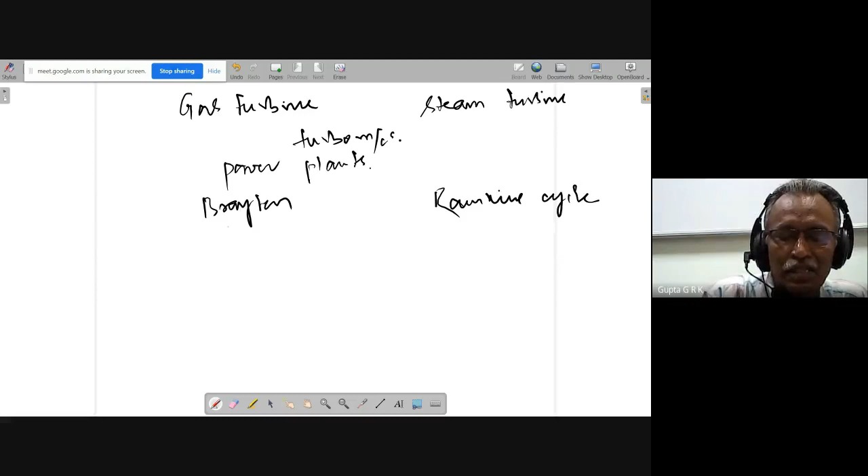So when we see the gas turbine and the steam turbine, both are turbomachines, and both run the power plants, and both run on cycles. This is a Brayton cycle, this is a Rankine cycle, and both will have four processes, as I told: compression, heat addition, expansion, and heat rejection.

So this compression is isentropic here, and this is also the same. Heat addition is isobaric, so this is also the same. Expansion is isentropic, and here also it is the same. And heat rejection is isobaric, and this is also the same.

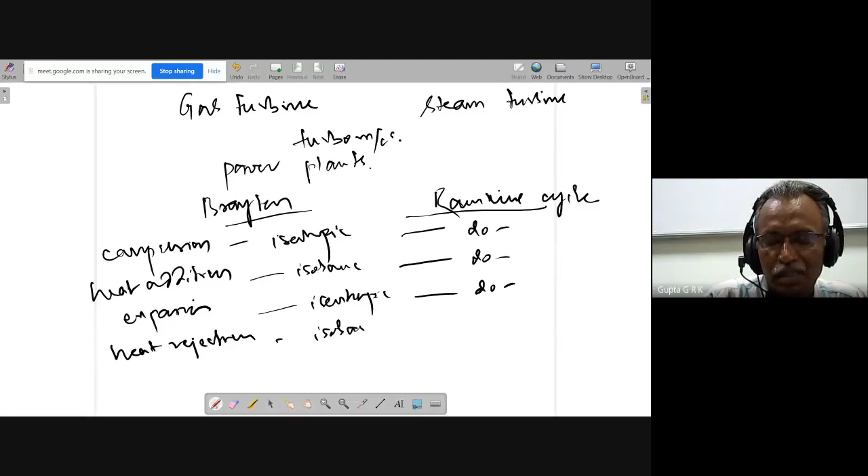All four processes are similar processes, but still we call them different cycles because one runs in single phase, the other runs in two phase - that is the only difference. So you will see the phase diagram in the Rankine cycle, you don't see that in the Brayton cycle. It is completely, we assume the gas is perfect gas mostly, or real gas also, or ideal gas - sometimes Cp and Cv variations also we consider. So this is the main thing between the Brayton cycle and Rankine cycle.

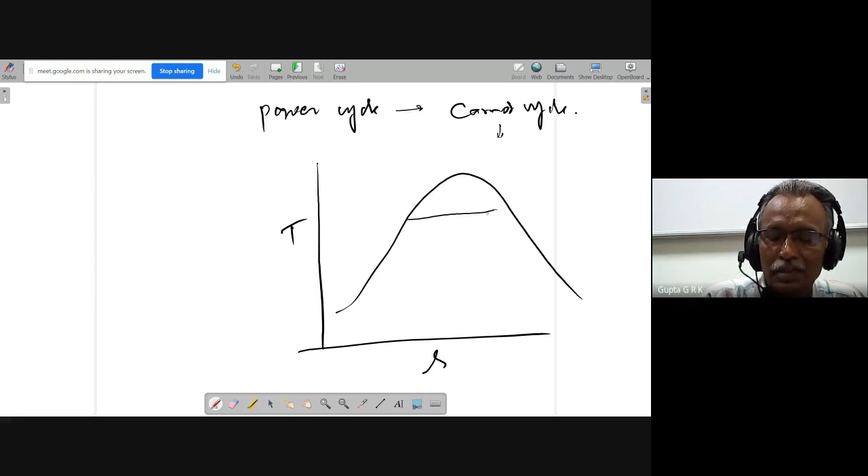And always we try to have a power cycle, because both are power cycles only. I want to have a Carnot cycle. So when you have a TS diagram with phase line, and if I want to have a Carnot cycle, what I can think of is a cycle like this. This is pumping, and this is heat addition. And I can say WT - there is the turbine and the QL. So this is the way I can assume a Carnot cycle, which is a clockwise cycle within the phase diagram.

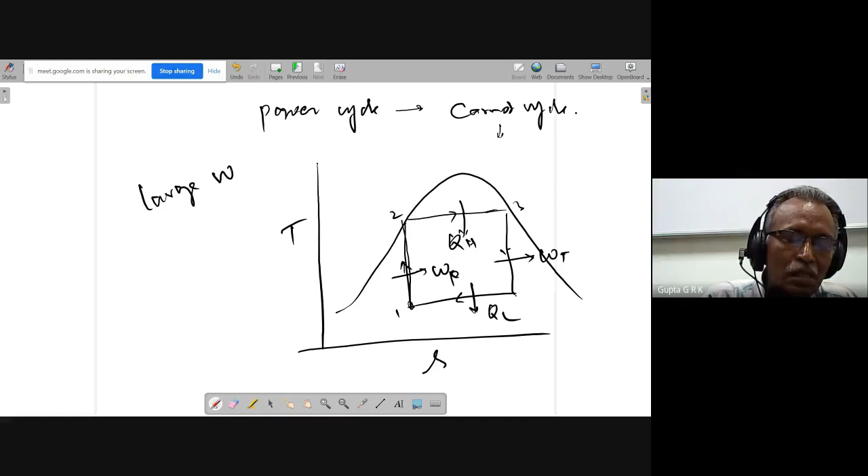So when people tried this, we have discussed already that there are some practical problems. One is the pump has to work in two phase, and also the volume, because most of it is vapor, and it needs a lot of compressor work. We cannot say pump or compressor because it is a two-phase one, and because it occupies large volume, it will be of a large size and large work of compression will be needed.

And another thing is this point - point 4, that is the wetness at the turbine exit. I should not have so much wetness here, because during the expansion there will be condensation and droplets form, and it erodes the blades.

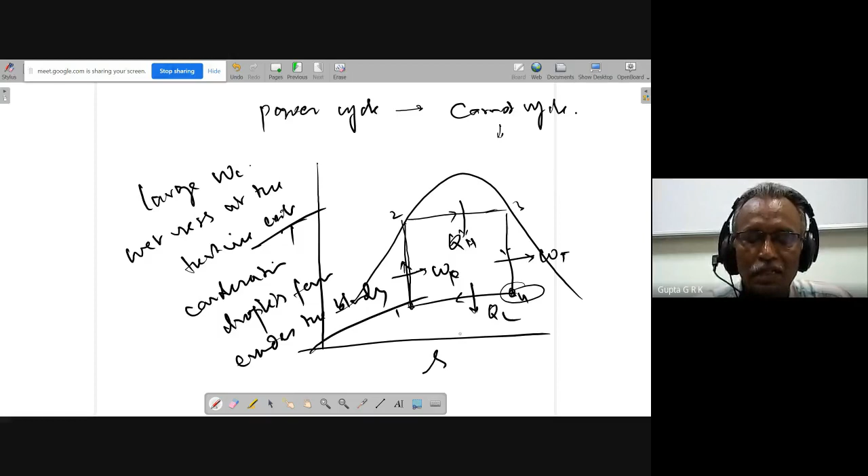So I cannot have this way, but still people may think of Carnot cycle in a different way. Suppose if I assume the Carnot cycle going like this, so that this problem of these two points will not be there. There will not be two phases, only a single phase. So you can think of a cycle this way also.

So again, WP, WT, QH, and QL. Here there will be other problems. This is going to very high compression ratios, more heat rejection, yeah, high compression ratios. Heat rejection, more heat addition, rejection will be there. This is not the main problem.

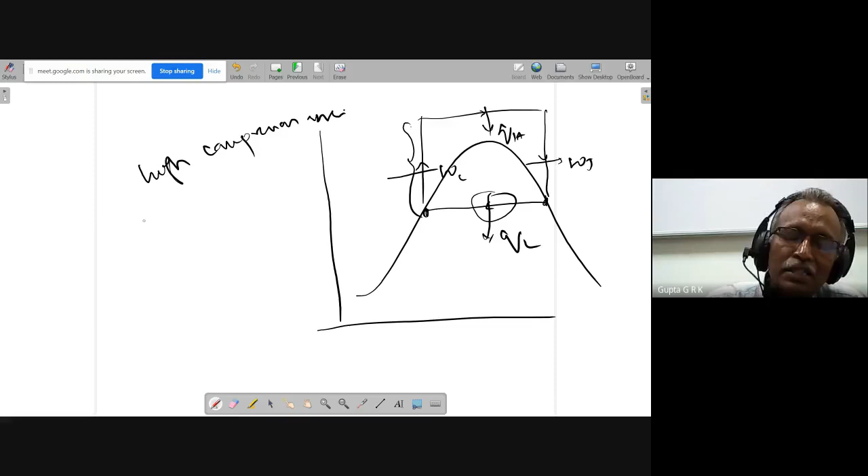The main problem is heat addition, isothermal heat addition. If it is going out, isothermal heat addition, which we know is very slow and not practical. So these are the main restrictions for the Carnot cycle. Because of that, we go for what is called the Rankine cycle.

So when you think of Carnot cycle like this first, I want to make this single phase, so you can condense it up to here. So your point 1 shifts to this point, and here there will be compression. If I draw a constant pressure line like this, this is the compression, the work of which is very much negligible compared to the previous one. So this is one thing that happens.

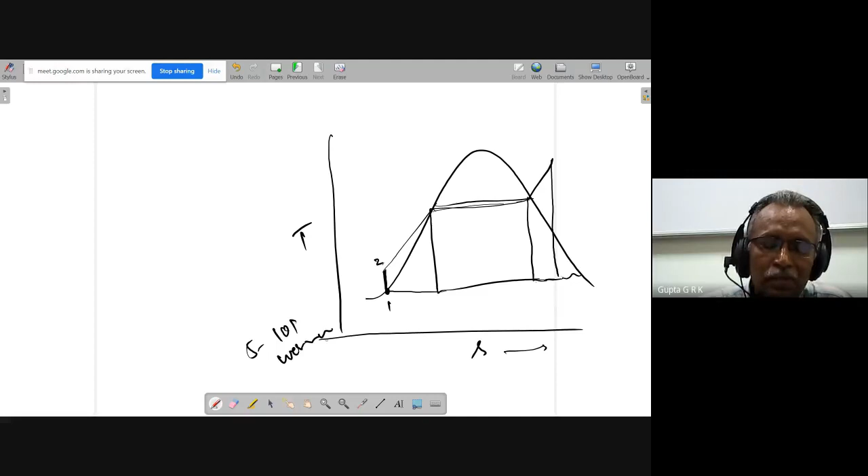And on the turbine side, we try to shift this side, so that if I have superheat like this, I can reduce this wetness. Up to 10%, or 5 to 10% of wetness is allowed, because it starts condensing only at the end of the expansion, so it will not damage much because it is very fast and it goes out. So this is the way we have what is called as Rankine cycle.

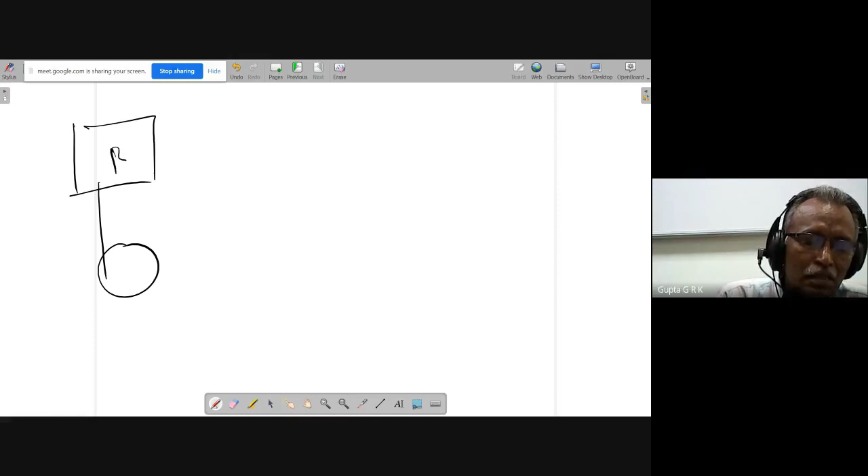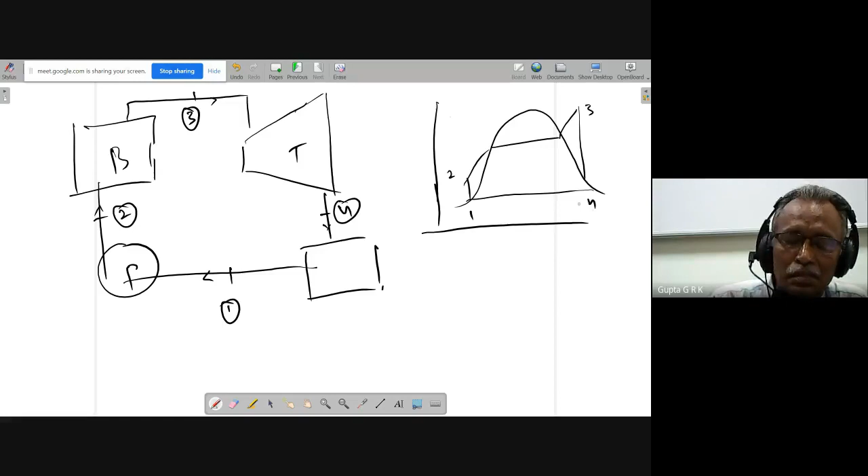So then if you see the schematic: boiler, pump, turbine, and so on. This is 1, this is 2, this is 3, this is 4, and this is clockwise, let me see the cycle. So here I have to write WP and QH, WT, and QL, and here there will be a generator also. So this is the way it will be, and so this is WP, this is QH, this is WT, and this is QL.

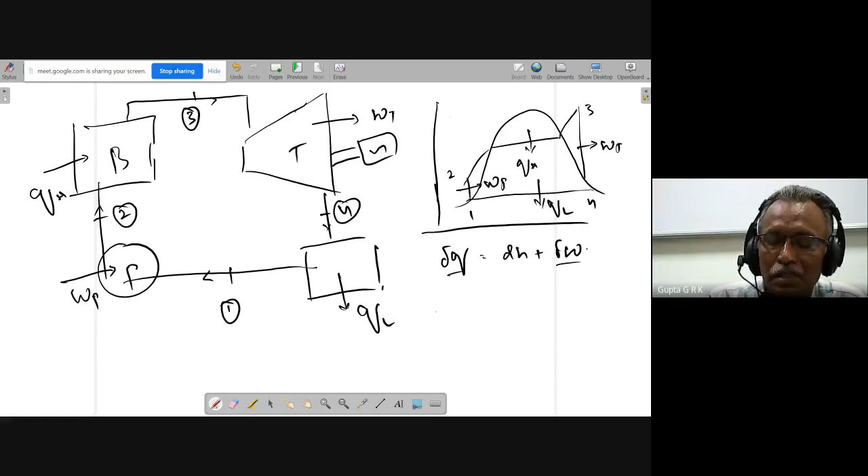As we already discussed, delta Q equals dH plus delta W, and in each process either delta Q or delta W, only one of them will be there, so everything is change in enthalpy only. So WP is H2 minus H1, QH is H3 minus H2, WT is H3 minus H4, and QL is H4 minus H1. W net equals either WT minus WP, or you can write QH minus QL, you can see both will be same, and you get quantitatively the same thing. The efficiency is net work by heat supplied, that is QH minus QL by QH, or 1 minus QL by QH. So like this, we solve the problem.

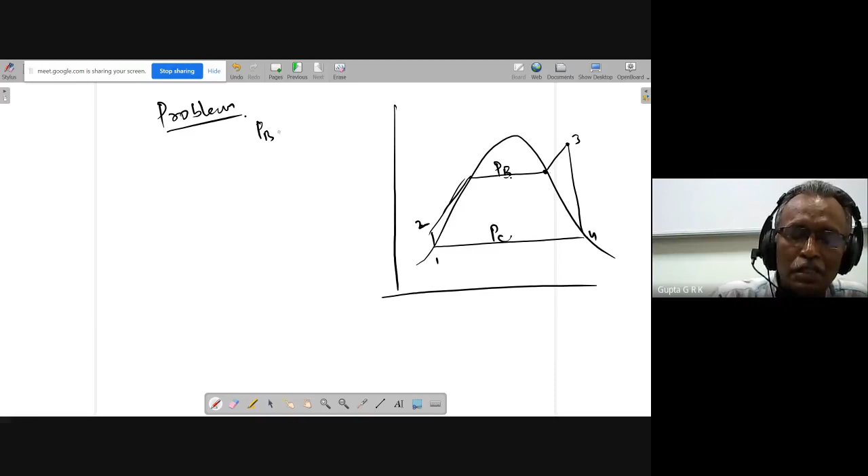So when we solve the problem, what I want is enthalpies at all four points, that's all. Usually the data given is the boiler pressure and the condenser pressure, and the turbine inlet condition will be given, it can be saturated or superheated like this. So this is the data given: PB equal to P2, also equal to P3, P condenser equal to P1, also equal to P4, and you will be given T3. These are the data given, and you have to solve the problem using the steam tables. So H1 first: H1 equals, because it is on the saturated liquid line, HF at P1.

So when you go to the saturated tables, some more things I will see. At P1, you see H1 and also V1, and also note down HF, HFG, SF, and SFG, because I write this as 4. Since P1 equals P4, I will take all those six readings at that particular pressure. Immediately if you write it down, the time can be saved.

And I want H2. So W pump equals V dP, V1 into P2 minus P1. P2 is data, P1 is data, V1 is already obtained here. So this gives me WP, and this is also equal to H2 minus H1, so H2 equals H1 plus WP, that gives you H2. Then H3, because I know both pressure and temperature, I can find out H3, at P2 and T3. And here itself, I can find out S3 also.

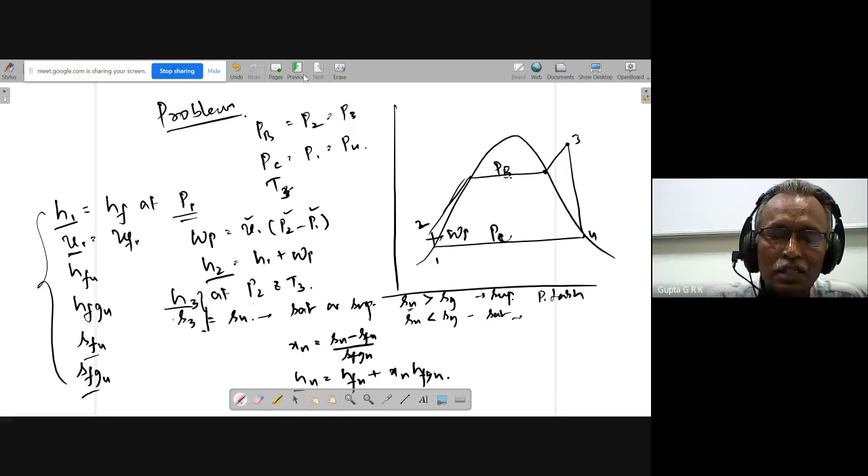So H1 is there, H2 is there, H3 is there, H4 is there. So once you have all, you can just use the formulae that are given in the previous one. So all these formulae we have to use and find out the efficiency. Okay, this is the way we have to do. And just we'll see one problem.

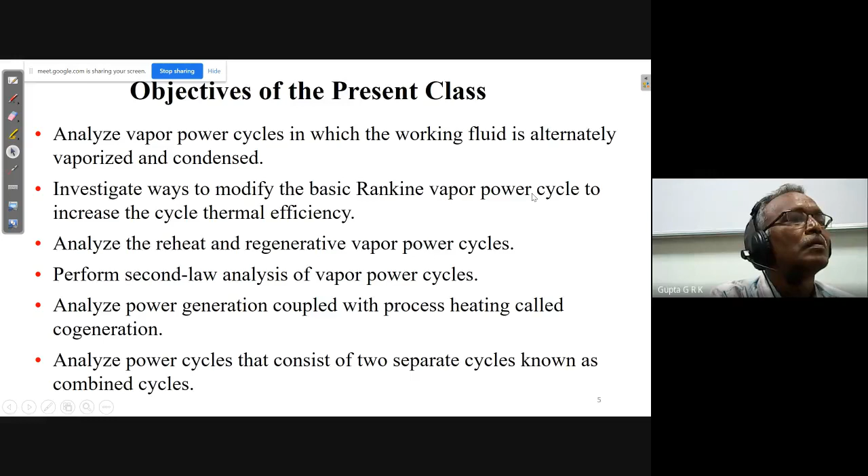The problem: determine the efficiency of a Rankine cycle using steam as the working fluid in which the condenser pressure is 10 kilopascals, the boiler pressure is 2 megapascals, and the steam leaves the boiler as saturated vapor. So it is saturated vapor it is leaving, and 10 kilopascal and 2 megapascal are given. So exit condition is also given clearly.

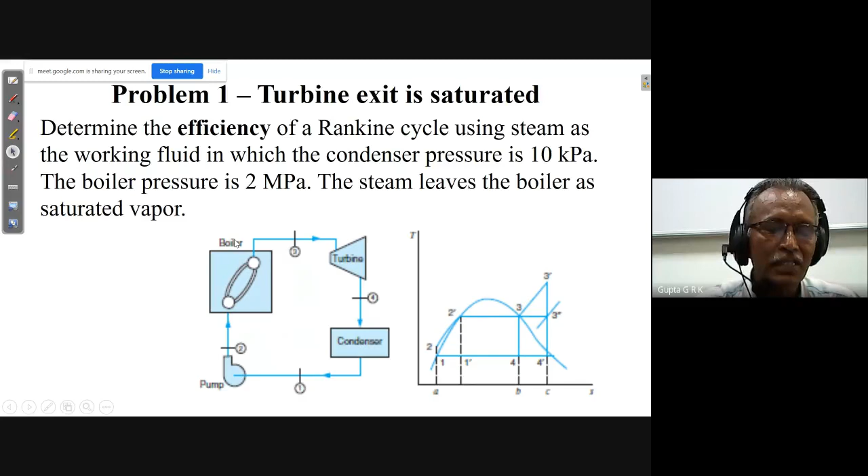So P1 is equal to 10 kilopascals, P2 is equal to 2 megapascals, and X3 is equal to 1.0. It is like this: this is 10 kilopascals, and this is 2 megapascals.

Okay, this is the data. This is sufficient, right? So I can go to the saturated tables, and we have to go to page number 890 here in this Cengel book. So it is the pressure table, saturated water pressure table. So you can see pressure at 10 kilopascals. What are all the things, right?

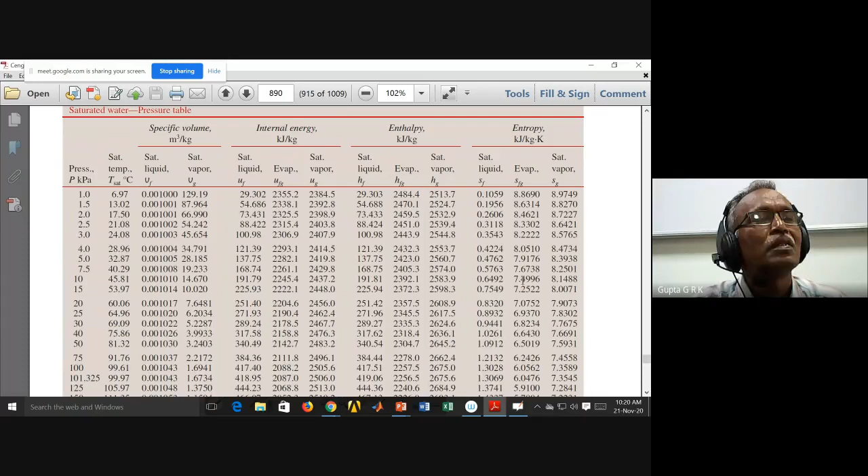You can see here HF or H1 is 191.8 and V1 is 0.00101. And also I have to note down HFG, SF and SFG, right? So HFG is 2392.1 and SF is 0.6492 and SFG is 7.4996. So all these things I have to note down.

Okay, so once I know that, I know H1 and H2 you have to find, because V1 is there, V1 into P2 minus P1. Okay, so at P1 equal to 10 kilopascal, H1 is equal to 191.8 and V1 is equal to 0.00101. So if I note down some values, I have to note down the other things.

Then WP is equal to V1 into P2 minus P1. That is 0.00101 into kilopascals. I have to put 2000 minus 10. Okay, so you will get some 2 kilojoules per kg. So this is kilojoule per kg.

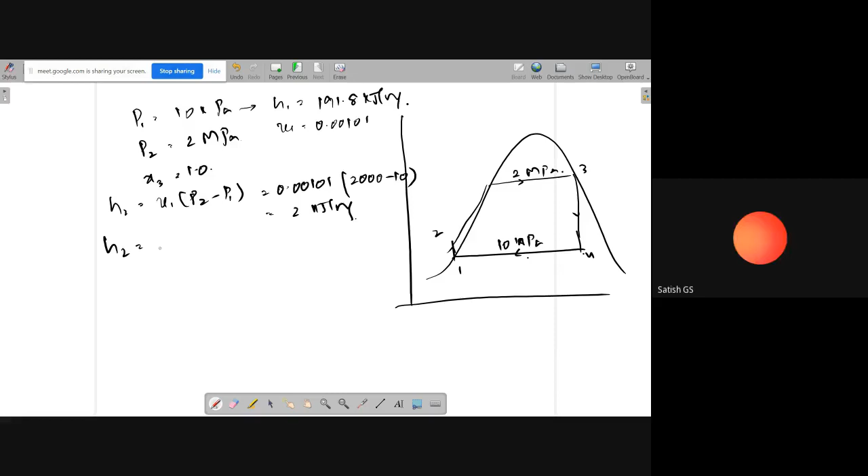So H2 is equal to H1 plus WP. This is WP. H2 is equal to H1 plus WP, that is 191.8 plus 2, that is 193.8 kilojoule per kg. Okay, so this is the way. And then you have to go for H3.

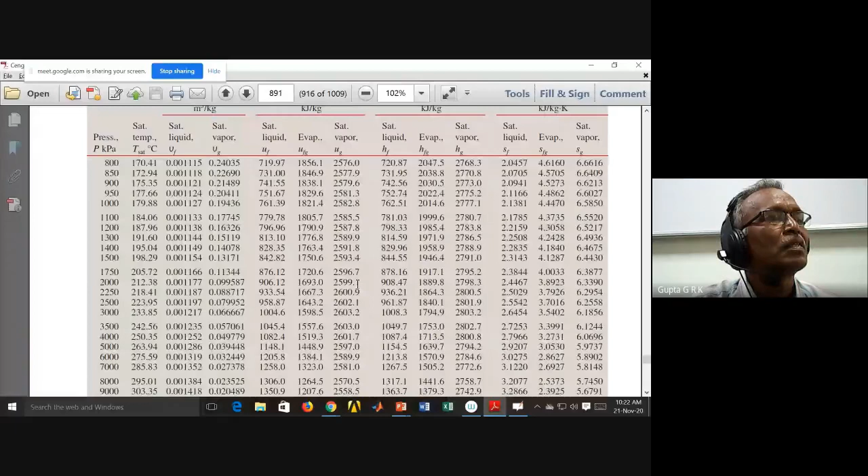H3, you have to see the same tables, saturated tables only. 2 megapascals, I have to find out Hg. So here 2 megapascals I have to go, that is 2000 kilopascals. So at 2000 kilopascals here, I have to find out what is Hg, that is 2798.3. And Sg also I have to find out, that is 6.3390.

So this is S3 and also S4. Okay, so this is the way I have to note down H3 and S3.

So H3 is equal to 2799.5 and S3 is equal to 6.3409, which is also equal to S4. Okay, so we have to find out X4, which is equal to S4 minus SF4 by SFG4. So as I told, SF and SFG values at 10 kilopascals I have to take. So if you see, those values are 0.6493 by 7.4996.

So you will get 0.7588. So you can see that actually the wetness is very much because it is only saturated here at the exit. So from the starting of expansion itself, condensation starts. So there is more wetness. So it is only for problem's sake we are doing it.

But just to know that if I do like this, I'm going to get a damaged turbine. So because of that, I have to go for superheat. So to understand that, I am doing this problem. So then H4 is equal to HF4 plus X4 HFG4. So H4 is 191.8 plus X4 is 0.7588 and HFG is 2392.8, and we will get some 2007.5 kilojoule per kg.

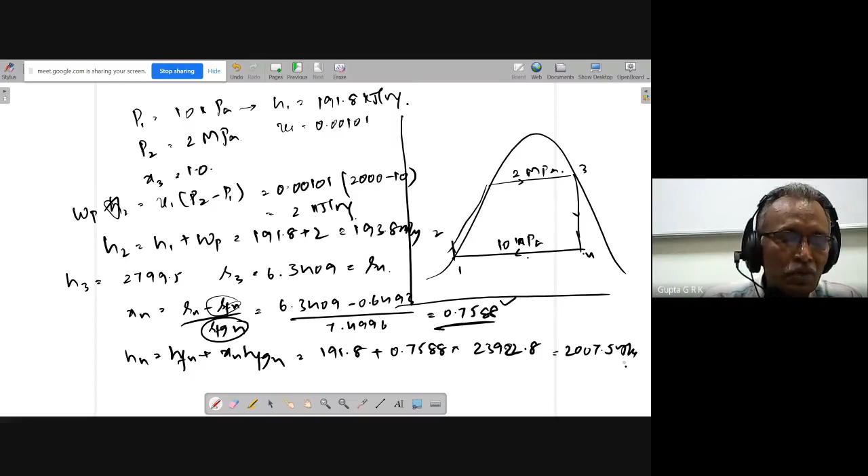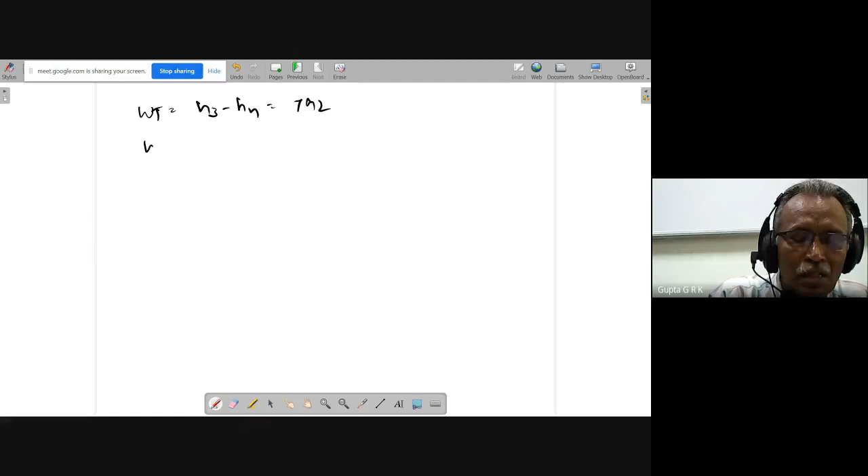Okay, once I get H1, H2, H3, H4, then you have to find out all the works. WT is equal to H3 minus H4, which you will get as 792. And WP already we calculated, H2 minus H1, which is 2. All are kilojoule per kg only, right?

I'm writing fast. And QH is H3 minus H2, which comes to 2605.7, and QL is H4 minus H1, which is 1815.7. So W net you can find out in two ways: WT minus WP, that is 792 minus 2, that is 790 kilojoule per kg. And even if you write it as QH minus QL, you are going to get the same thing, 2605.7 minus 1815.7. You are going to get 790 only.

So eta is equal to W net by QH, that is 790 by 2605.7, which comes to 0.303, that is 30.3%. So even if you write 1 minus QL by QH, also you are going to get the same thing. This is the way a simple Rankine cycle can be solved.

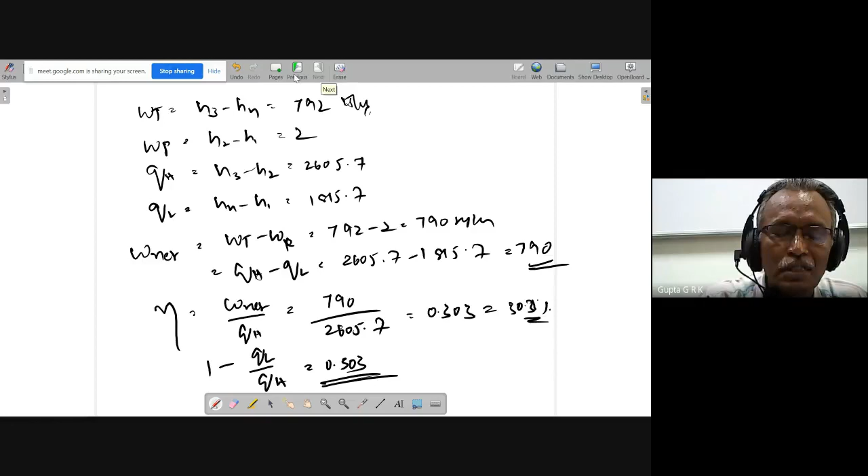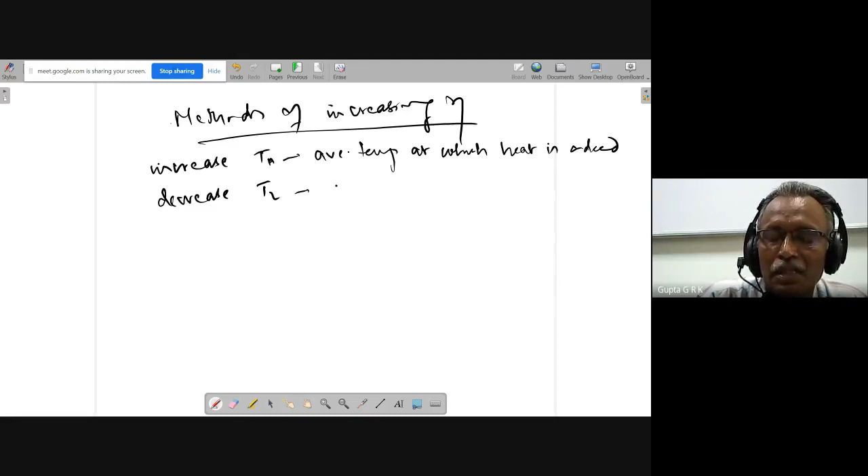Okay, if you want to increase the efficiency, I have to either increase TH or decrease TL, because it is like 1 minus QL by QH. So it is not just TH, it is the average temperature at which heat is added, and this is the average temperature at which heat is rejected. So for increasing the efficiency, one of these I have to do.

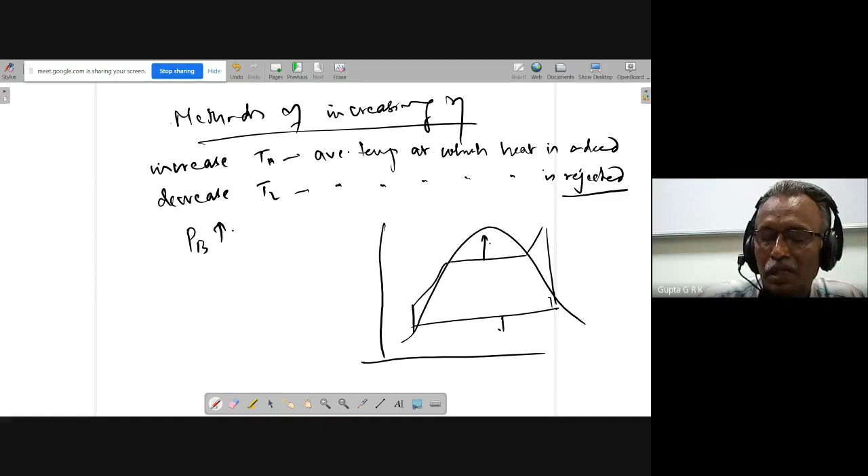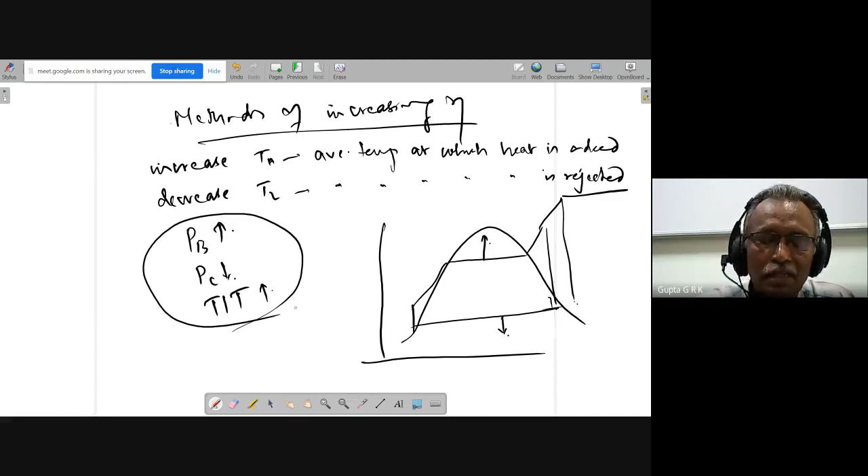So if I take the cycle, I want to increase the area. So either you take this up, that is increase boiler pressure, or you can take this down, that is decrease the condenser pressure, or you take this up, increasing the turbine inlet temperature. We call it TIT, turbine inlet temperature, which is to be increased. So one of these three ways, it is definitely going to increase the efficiency.

Okay, so if you take up another problem, which includes all of the three. And okay, one more thing I have to discuss.

So here, if you increase the boiler pressure, what's going to happen? So previously, with lower boiler pressure, I am getting this cycle with the same turbine inlet temperature. And with increasing boiler pressure, I am getting like this. So there is an increase in the work. But the thing is, here 4' is coming in. So that is the wetness increases. That is the main problem.

The side effect can be corrected by reheating the steam. If I want to correct it, I have to either superheat to more extent, or I have to give a reheat. That is, after expanding, you have another turbine, and then if you come like this, it is going to be more dry. So this is by increasing the boiler pressure.

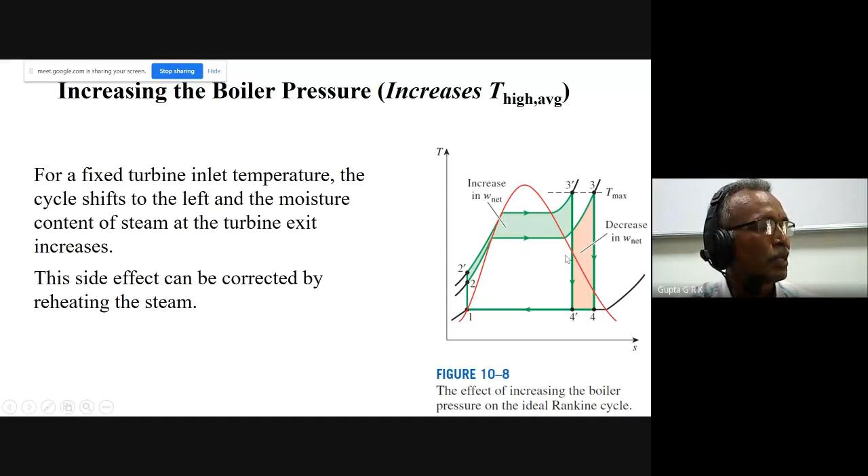So both increasing boiler pressure and decreasing the condenser pressure increase the efficiency, but the wetness at the exit of the turbine increases. So whenever I want to use this, I have to have more superheat. So superheating is to be used. But again, here also, the advantage of superheating is the wetness decreases and there is more dryness.

But there is a limit. I cannot increase to whatever extent I want. And this is also like gas turbines, we have a metallurgical limit. The temperature is limited by metallurgical considerations. Presently, the highest steam temperature allowed at the turbine inlet is about 620 degrees centigrade, not more than that. Okay, that is the limitation.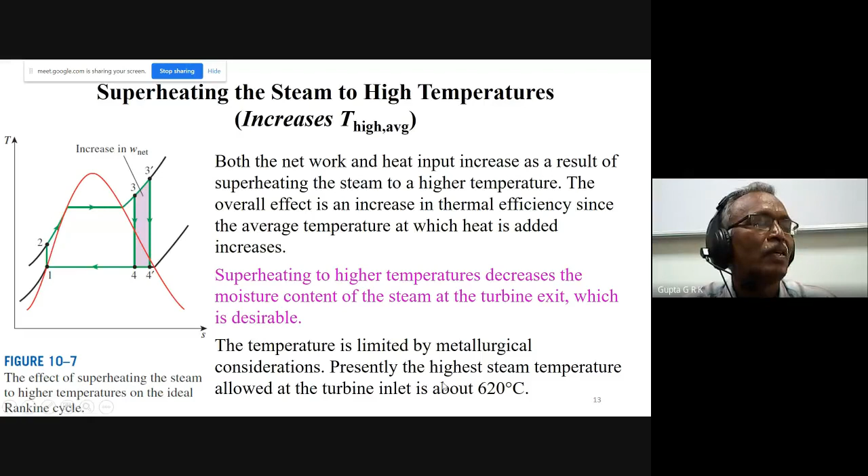Okay, if you see another cycle, previously 2 megapascal was the boiler pressure, now I will make it 4 megapascal. And I will have some superheat also. As I told, unless I have superheat, there will be still more wetness. Already wetness is 25%. It will increase further, so I use 400 degrees centigrade. And condenser pressure is 10 kilopascal.

Usually 10 kilopascal is the limit, we will not go further down. So usually, if I don't have a vacuum pump at the exit, it exits at atmospheric pressure only. How can I go to 10 kilopascals? Atmospheric pressure is 100 kilopascals, so I'm going to 10 kilopascals. So I have already reduced the condenser pressure to vacuum pressures. That's what you have to understand.

Okay, then if you go for this problem, so I have 4 megapascal, 400 degrees centigrade, and 10 kilopascal. And so if you...

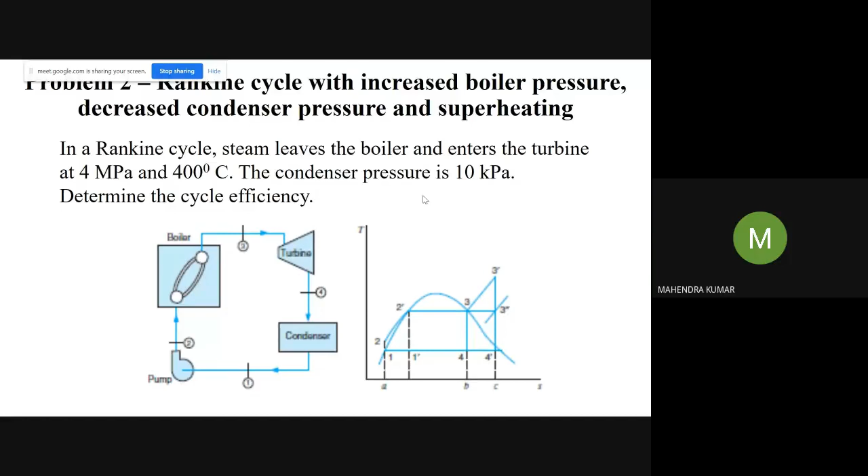Sir? Yes. Sir, can you teach the open feed water and closed feed water? Yeah, I will go to that. I mean, just only less time left. What is that? Time may not be there like that. Yes sir, I will come to that. No. Okay.

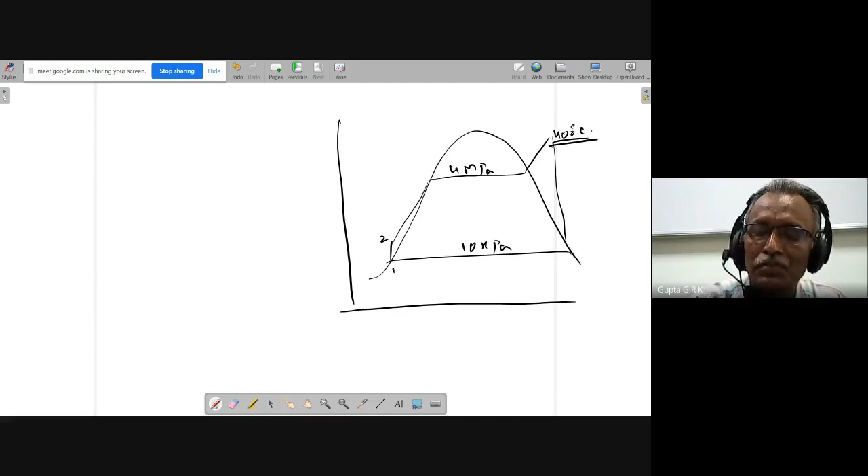So this is 10 kilopascals, this is 4 megapascal, and this is 400 degrees. Okay, so this is the way we do. And procedure, everything is same. There is nothing much different. Only thing is, for state 3, instead of saturated tables, I have to see the superheated tables. So that is the only difference we do.

And if we do like this, okay, I'm not doing all the problem. H1 is 191.8 only as previous one, and H2, when you see, because WP is equal to 0.00101 into 4000 minus 10, so previously it was 2 kilojoule per kg, now it is 4 kilojoule per kg. So 191.8 plus 4, 195.8 will come. And H3, that is in the superheated tables for 4 megapascal and 400 degrees centigrade, so you will get 3213.6, and S3 you will get 6.769.

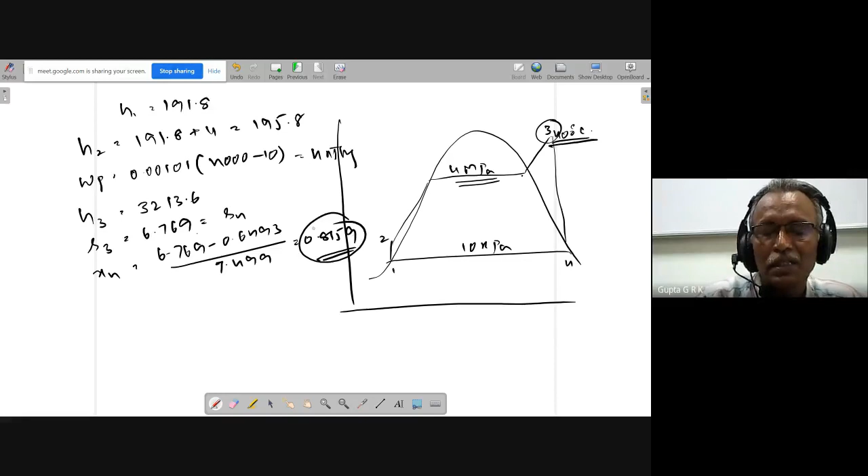So once you get that, this is S4, and X4 you will have same values as SF4 and SFG4. So 6.769 minus 0.6493 by 7.499, you'll get 0.8159. So you can see that though there is increase in the boiler pressure, previously it was 0.75, so it should actually decrease to 0.65 or something. But because of the superheat, it is coming to 81% dryness. And so H4 you can find out, it comes to 2144.

And so you find out all the W turbine net and everything, and the efficiency, if you calculate, you will get some 0.353 or 35.3%. So the previous problem we got 30.3%. So this is increased to 35.3%. 5% increase in steam power plant efficiency is too high. Okay, this is so big an achievement.

Okay, and so as I told, still this 0.8159 is having problem, right? I don't want so much of wetness. So because of that, we go for what is called as reheat.

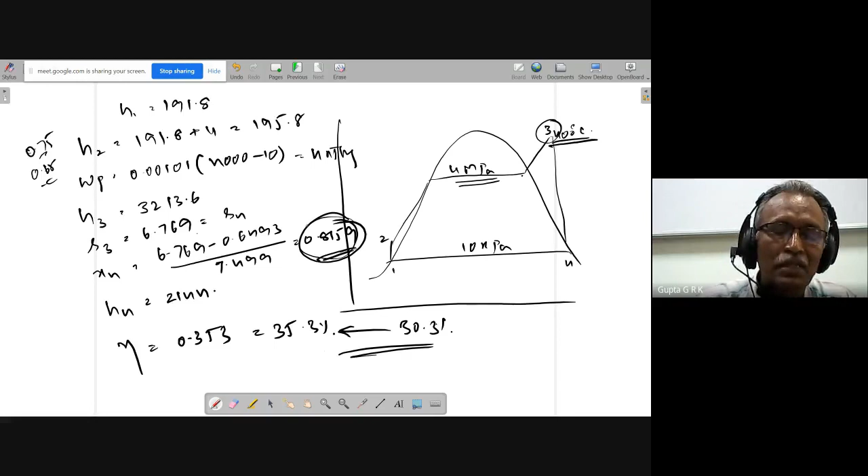So in reheating, what we do is, instead of directly going down up to some extent, it will expand in the first turbine. I will have again reheating, and I'll go like this.

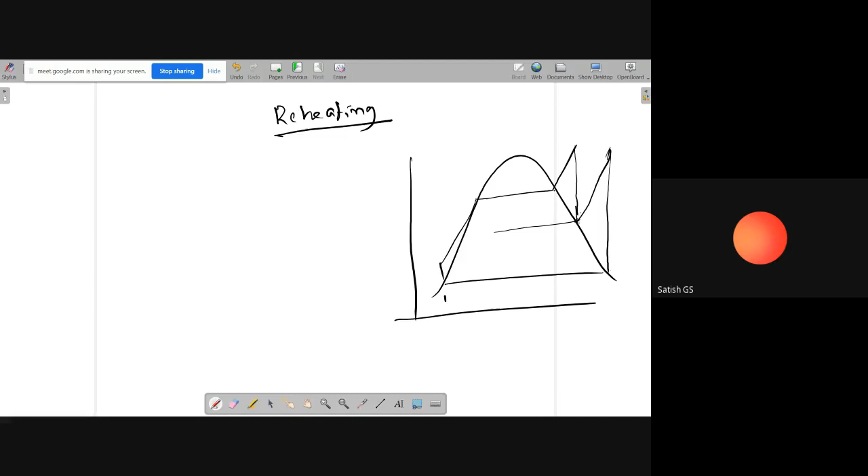Sir, one doubt. Yes. Sir, the first expansion, it need not be saturated. It may not be saturated, it can be superheated also. So I cannot say exactly. So always it is preferred to be superheated, or it can be saturated also. It should not have wetness of 5%, that's all, whether first turbine or second turbine. Okay sir. Okay, so sometimes it will be superheated, sometimes it will be saturated, or a small wetness may be there, right? So we don't know, depending on our design. So either here or here, it should not be more than 5%.

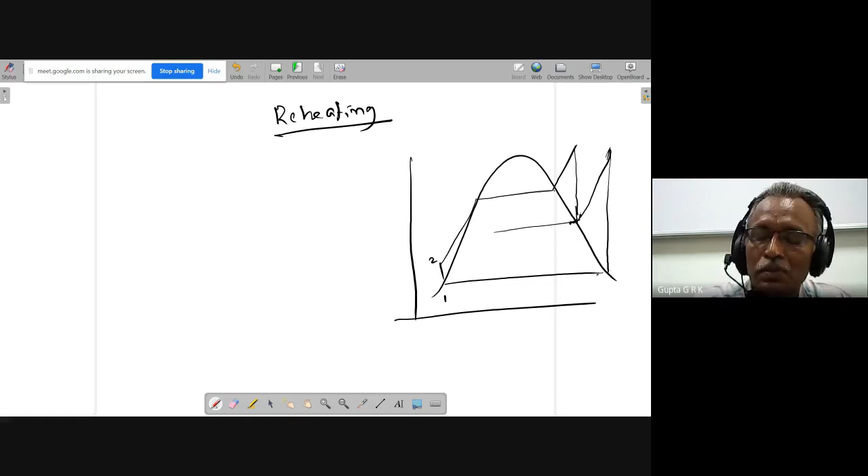Okay, so here 1, 2, 3, 4, 5, 6. Okay, and if you see here, boiler, so I will have first turbine, and then I will have reheat, and then I will have second turbine, and then I will have condenser. So that the boiler, turbine 1, turbine 2 run the generator. So I can put 1 here, 2 here, 3 here, 4 here, 5 here, and 6 here, like this.

Okay, so this is the way we do it. What I have to get is usually T3 and T5. If it's not given, usually they will have the same temperatures because I can reheat up to that temperature, that is the metallurgical limit. Or if it is given, it may be less than that based on how much output I want. So I can reduce the reheat, but the maximum position I can go up to is T3.

So P1 or PB, or P condenser, and the P intermediate pressure also will be given. So this data is to be given, and this reheating temperature also is to be given. T3 should be given, and T5 should be given. So this is the way we solve the problem.

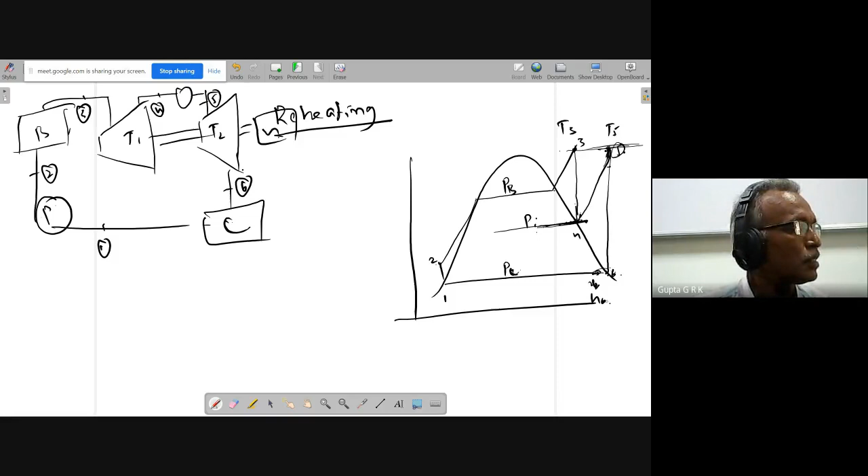So like this, we have to do it. Any doubts about this? So we'll see how the problem will be.

Another thing is sometimes we can have what is called a supercritical Rankine cycle. So after compression, during combustion, when you view the constant pressure line, 2 to 3 is a constant pressure line. So it is not going to the saturation curve, it will not cut it, it just goes straight away, and from there is expansion. There are supercritical boilers too.

When you study power plant engineering, you will study about supercritical boilers also. That is, this heating from 2 to 3, there will not be any phase change. It's just to have an idea, and because its efficiency is higher, sometimes people go for that. But because the pressures are very high, you have to be careful about leakages and all.

Okay, coming to the reheat cycle. And another thing.

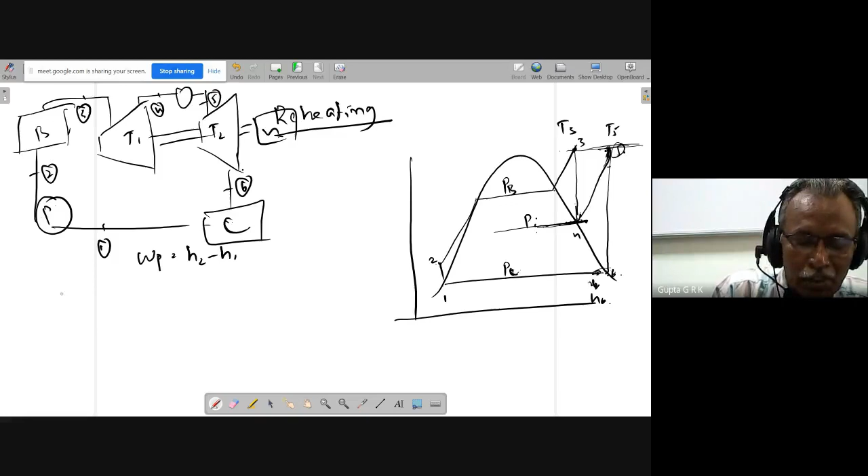So once you find out all the enthalpies, WP is the same, H2 minus H1. But when you take W turbine, I will have two turbines. So first turbine work is H3 minus H4, and second turbine work is H5 minus H6.

And for QH, there are two heat additions: one is H3 minus H2, and another heat addition in the reheat is H5 minus H4. And the QL will be the same, H6 minus H1.

So again, you find out W net, either WT minus WP or QH minus QL. And efficiency, you can find out either W net by QH or 1 minus QL by QH, whichever way you want. So this is the thing: I have to find out all the six enthalpies and then find out this. Any doubt about anything to find out?

Mainly here, when you find out H4 or H6, you have to check whether it is less than Sg at this pressure or greater than Sg at this pressure. If it is less than Sg, you have to find out the dryness fraction, that problem is there. If it is more than Sg, what I have to do is see the superheated tables of this pressure, and this entropy, where it is lying, it may come between two temperatures.

I have to interpolate for that particular temperature. If it is between 300 and 400, I have to see it may be 336 or something, and H also I have to interpolate. If at 300 it's this much, at 400 it's this much, at 336 what is the enthalpy? So I have to interpolate if it is superheated. If it is saturated, I have to find out the dryness fraction and then enthalpy. That is the main thing you have to check, whether you find out H4 and H6. Any doubt about it?

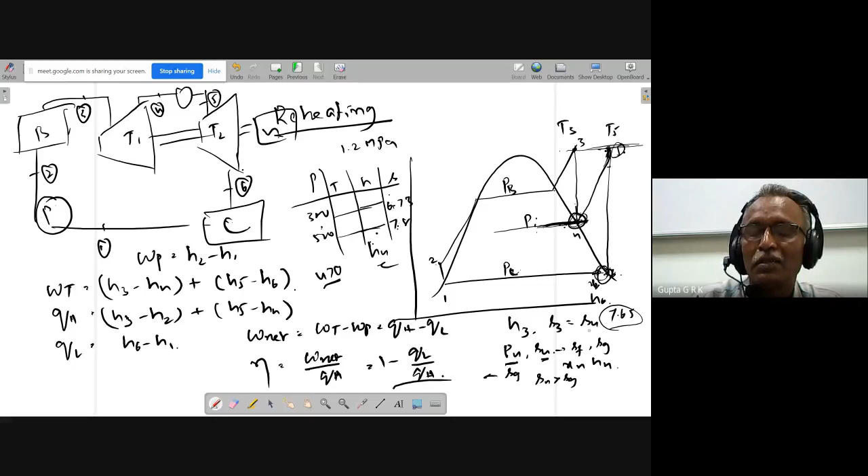If S4 is more than Sg, I have to do this. If S4 is between Sf and Sg, I have to find out, just like the previous problem, X4 and H4. So both at this point and also this point, same procedure we have to do. Is that clear?

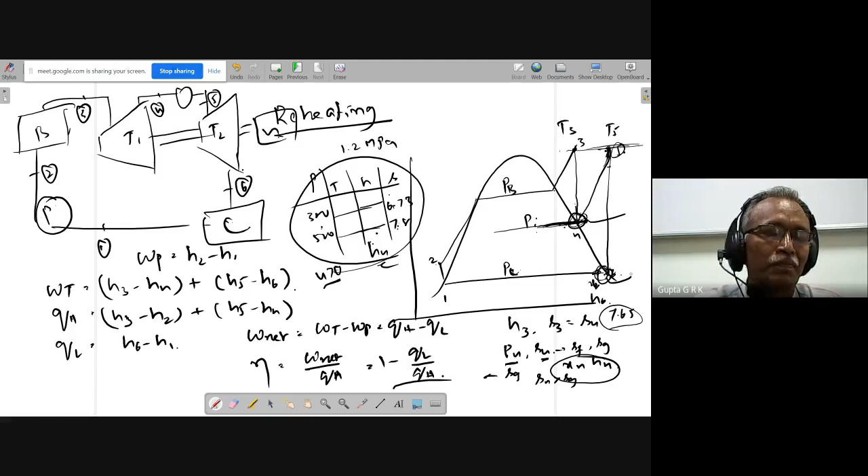Yes sir, yes sir, thank you sir. Okay, then we'll go for feed heating, right?

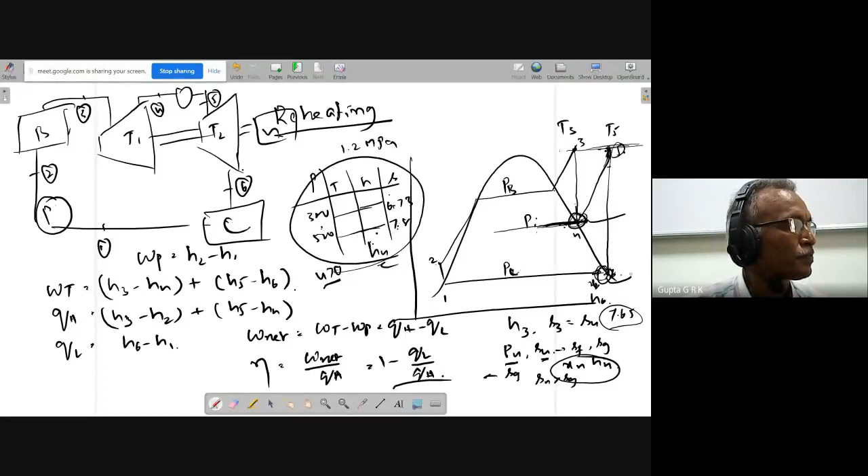Open feed water heater. Okay, I told you there is one more variation in the problem you may get. Just if I want to trouble you, Rankine cycle with reheating. It is a simple problem.

Consider a reheat cycle which enters the turbine at 4 megapascal, 400 degrees centigrade, as previous problem only. After expansion in the turbine to 400 kilopascal, the steam is reheated to 400 degrees centigrade and then expanded to the lower pressure turbine. Just like what I have explained, you have to do that way. First pressure is given 4 megapascal and condenser pressure is given 10 kilopascal and the intermediate pressure is 400 kilopascals. So I have to do the problem.

And there is another variation you may get like this. Steam enters the high pressure turbine at 15 megapascal, 600 degrees centigrade, and is condensed in the condenser at 10 kilopascal. If the moisture content of the steam at the exit of the low pressure turbine is not to exceed 10.4% with reheat to 600 degrees centigrade, determine the pressure at which the steam is to be reheated.

Okay, so this X6 is given. X6 is 10.4%. Not X6, 1 minus X6 is 10.4%. 89.6 is given, so 0.896 is X6. Based on that, I have to find out what is the intermediate pressure, that is P5 I have to find out. Is that clear? So we will see how to, if I draw the figure.

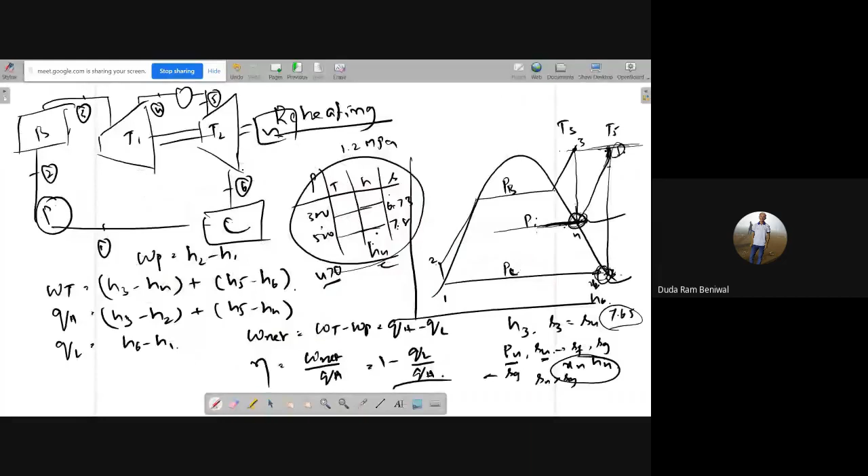I will. Sir, please explain. Yeah.

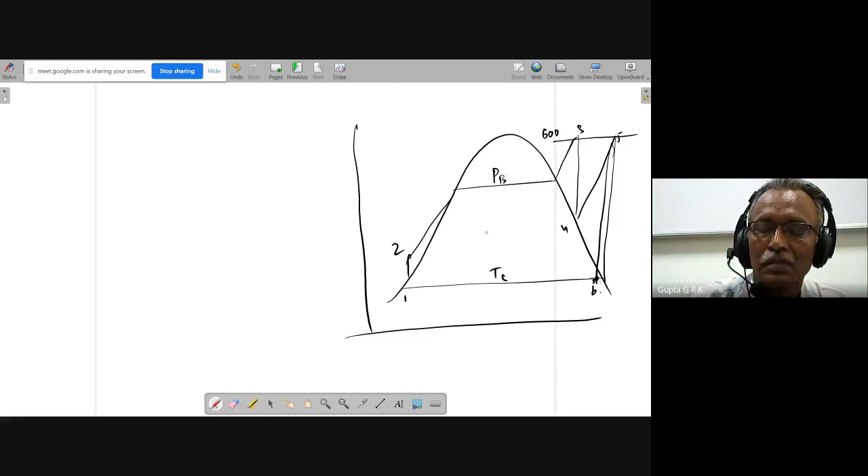This is 15 megapascal. Okay, so H1, H2 as usual we find out, and this can be found out, no problem. And here X6 is given. Okay, so how to go about this now? I have to find out this pressure of this line.

Find entropy at 6. X6 is given, so S6, SF and SFG at P1 I can find out. So I can find out S6 is equal to SF6 plus X6 times SFG6. So S6 is equal to S5.

And I know this temperature. I know T5 and S5. I have to find out what is P5. How to do it?

By manipulating the table. So I have to see the superheated tables, find out at 600 degrees centigrade. Okay, I will just see what is the value.

Match the entropy. Yeah, match the entropy. Okay, suppose S5 is 7.37, S5 is equal to 7.37, and T5 is 600 degrees centigrade. So I have to see 600 degrees centigrade in the tables, because I don't have tables at a particular temperature, I have particular pressure only.

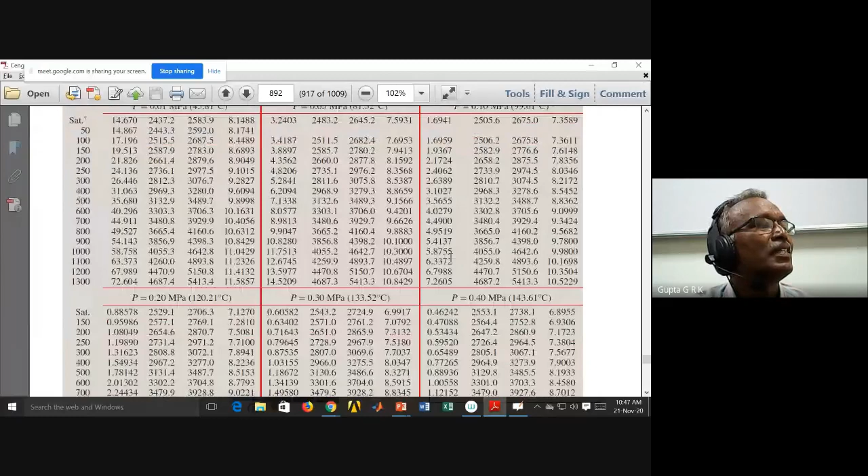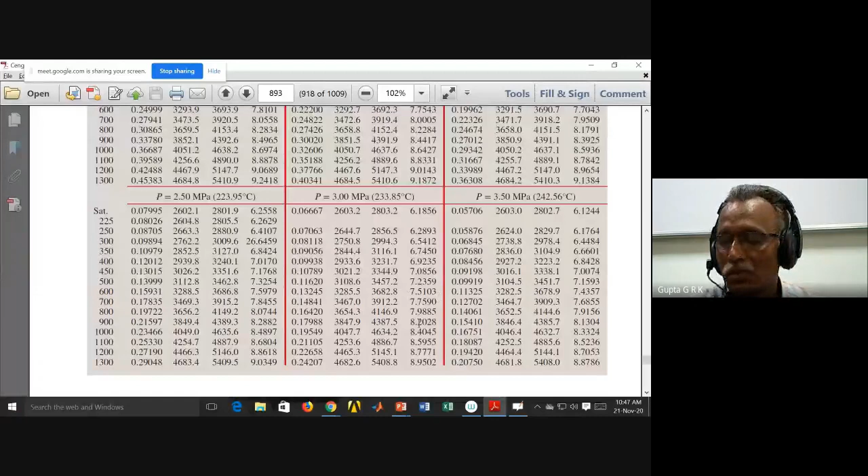Okay, so at 600 here, at this particular pressure, I have this much, and I have to go like this and see the temperature at 1 megapascal, 600 degrees centigrade, it is 8.03. And here it is 7.94. And my value is 7.37. So I have to come down further: 7.6, 600 degrees centigrade, 7.7. 600, 7.4, and 7.3.

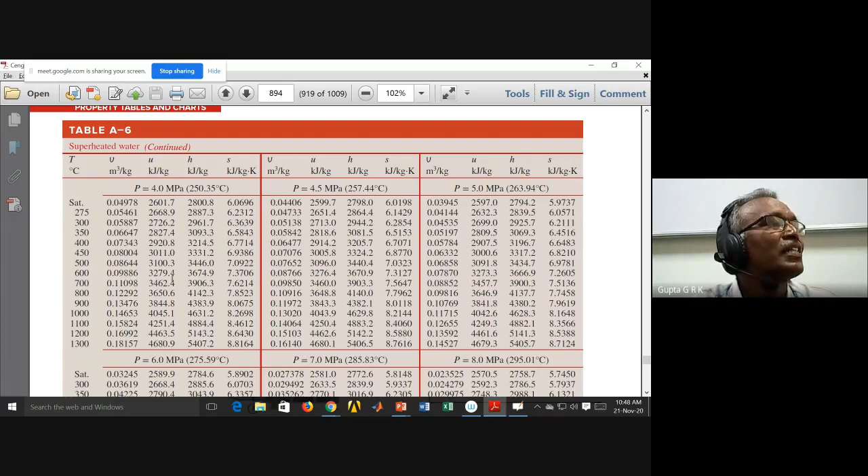7.37 - it is exactly matching, right? But it may not be like this. It may be between this and this. Suppose 7.35. At 4.5 megapascal, I have 7.31. At 4 megapascal, it is 7.37. If it is 7.35, what is the exact pressure? I have to interpolate, so that way once you get the megapascals, maybe 4.37. Then I have to see what is the enthalpy at this pressure, and again at 4.37 megapascal, what is that - I have to interpolate. So like that, I have to find out what is the pressure.

Is that clear? Pressure and enthalpy, I have to find that way. So once I get the intermediate pressure, the remaining problem is same as we have done previously. So that is the variation I can give, right? If I want to trouble you, I will go in a reverse way. Is that okay? Yes sir.

And then I will go for feed heating.

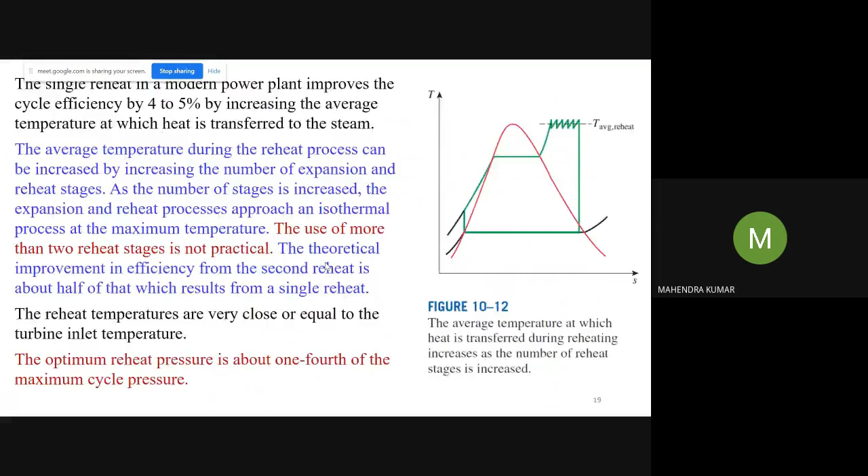Regenerative Rankine cycle - here what we do is, again, I want to increase the average temperature at which heat is added. If you see here, this temperature is here and this temperature is here. Because of this, the average temperature coming low. If I can heat it in some other manner, heat addition will be only from 2 to 3, which is quite high compared to this particular one. So this particular one, I want to heat by using steam that is extracted during the expansion. That's what we are going to do. Is that clear? The concept is clear.

I want to increase the average temperature at which heat is added. This is going from 2 to 3 like this, so the average temperature will be low because of that. If I can heat it by some other means, and in the boiler just heat from 2 to 3, the average temperature at which heat is added is increased and efficiency increases. And this is not in the boiler - what I do is I take some heat from during expansion itself. I have a number of turbines, suppose, and after 1 or 2 turbines I take some of the steam and heat the feed water till it reaches this point. This I want to avoid.

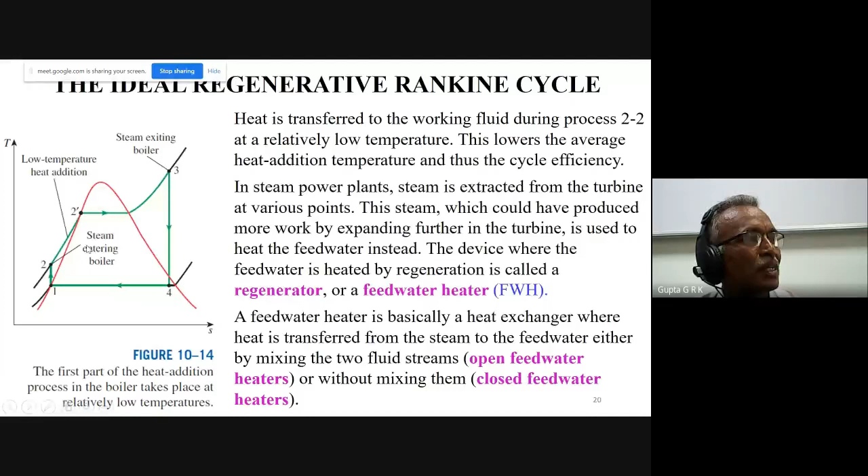So that is done - the figure gets modified like this. This is the way: from the boiler it goes to the turbine, and I have a number of stages, and in between I tap some of the steam and send it here. From the condenser, since there is some higher pressure, I increase this water pressure up to that intermediate pressure, and combine these two. This is open feed water heater, meaning direct mixing will be there.

Like heat exchangers, there are different types - direct mixing and indirect heat transfer. If I mix both of them, it is open feed water heater. Sometimes the hot steam is in one set of tubes and cold water in some other tubes, and then there will not be any mixing - that is called closed feed water heater. We will not worry about that now.

Open feed water heater - this steam and this water get mixed up. Here it is like this: from the condenser it comes this way, it is compressed in the pump up to intermediate pressure, where this is expanded up to that particular pressure - this is the same pressure line. So this steam at state 6 and this water at state 2, they mix together and come out at state 3 as saturated water. It comes like this, and this is at intermediate pressure. So I should have one more pump to increase it to the boiler pressure. This is the way the cycle will be.

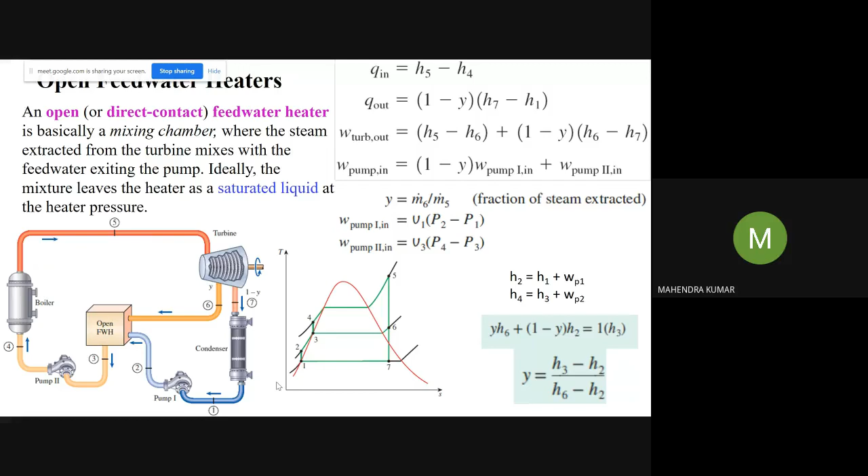Is this clear? Do you want to explain about closed feed water? Closed feed water heater, actually this is like this, and sorry, this is open feed water.

There will not be any pump, that is the main thing here. So here there will not be a pump, but the heat transfer is not efficient because they are not direct mixing - the complete heat is immediately transferred. So if you want good heat transfer between the steam and the water, it should be a very large heat exchanger. And when there is a large heat exchanger, lots of piping are there, there will be pressure loss. Okay, those problems will be there.

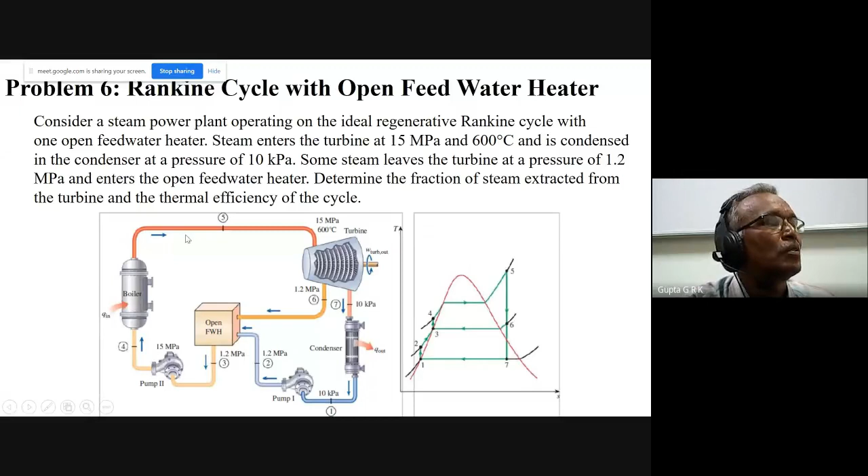Sir, explain derivation process, sir. Which one? For closed feedwater.

Then sir, how to find H5?

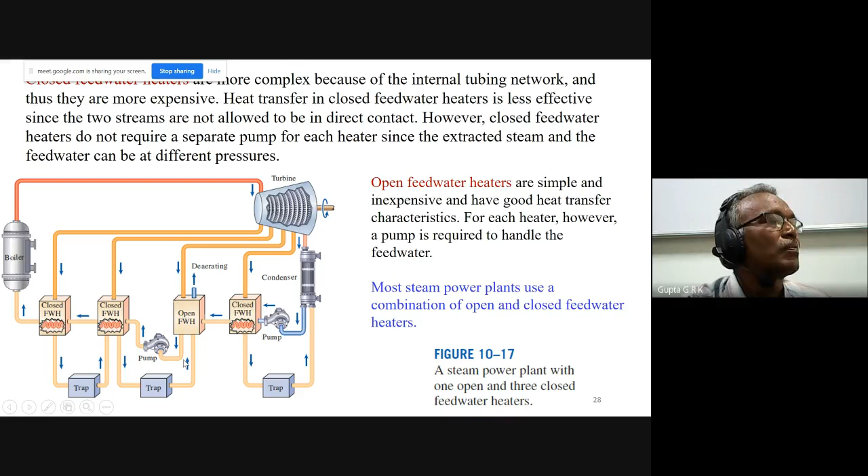Okay, everywhere I have to make the heat balance. Whatever mass is entering, either water or steam, into the change in its enthalpy is equal to - because heat is given by one and taken by the other, I have to make the heat balance for every feed water heater. Sir, T3 should be equal to T9, right?

No. Why? See, this is coming like this, and this is going like this. Okay, so in case of perfect heat exchanging, both should be in thermal equilibrium.

T7 minus T3 is equal to T9 minus T2, if masses are same, or both are water suppose. But here it is not like that. Is it clear? See, the heat given is equal to heat taken, that's all. So here, this is gaining heat, this is losing heat. So its temperature rises, its temperature decreases.

Okay sir, is it okay? Okay, I understood whatever you are asking. If it is a perfect heat exchanger, this T9 can come up to 3 - that's what you are telling, right? Yes sir. Yeah, so it may come like that. But we have to see whether it works or not.

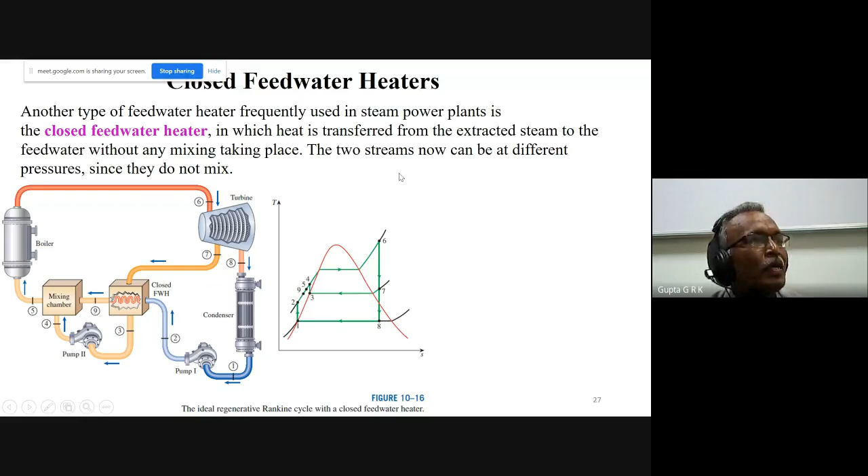For the open feed water heater, do you know how to solve the problem? I'll talk about that. Here I have to find out how much mass is to be extracted. That's one of the main things I have to work out. This is the open feed water heater problem.

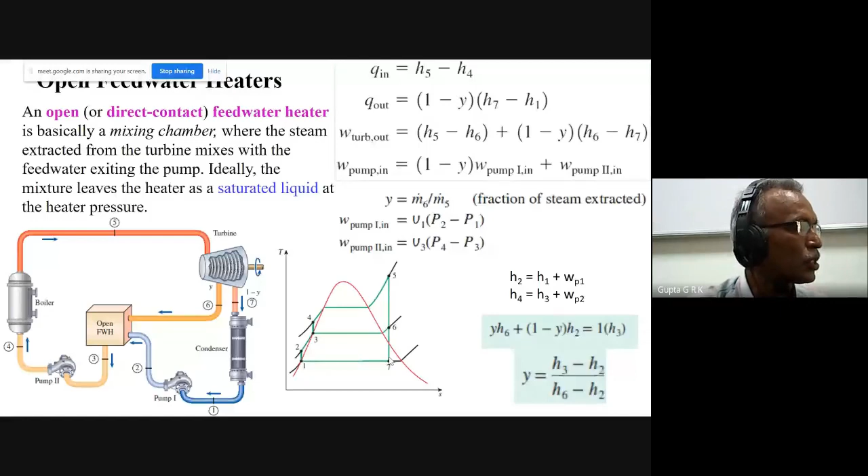1 to 2 is the first pump. This is heated in the open feed water heater from 2 to 3. Then 3 to 4 in the second pump, and 4 to 5 it is heated. Then 5 to 6 is up to the first few stages of the turbine, and mass is extracted here. So I have to find out how much mass is to be extracted, and the remaining mass is expanded further. It's not written here properly, so I'll show how to do it.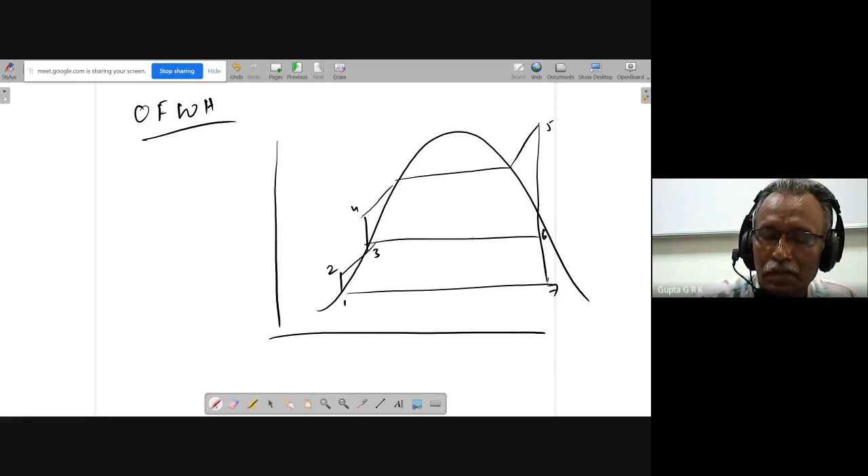So if I extract a fraction of mass x, suppose 1 kg is going like this, and a fraction x of it goes here, then 1 minus x will remain in the other stream.

In the open feed water heater, steam is coming from here with mass x and enthalpy H6, and water is coming from this side with mass 1 minus x and enthalpy H2. Both combine and come out as saturated liquid, with total mass 1 and enthalpy H3. So whatever enters as heat equals x*H6 plus (1-x)*H2, which equals H3. I have to find x. So x*H3 minus H2 equals... if I take x common, H6 minus H2 equals H3 minus H2, so x equals (H3-H2)/(H6-H2).

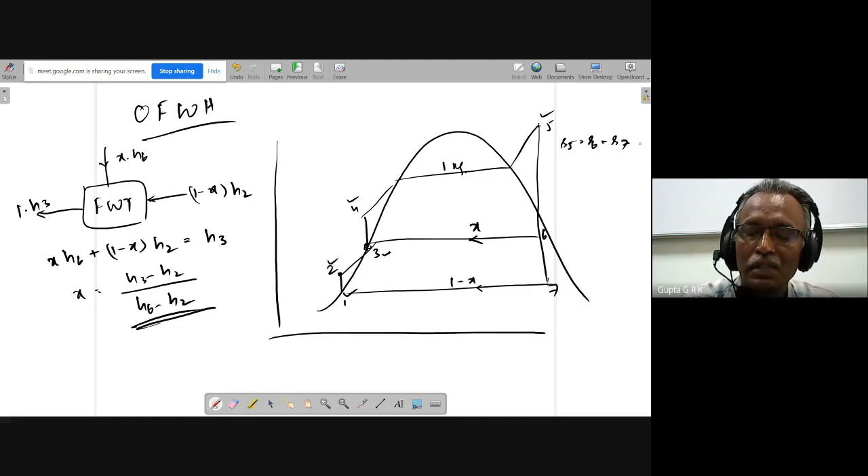So I can find H1 straight. From the pump work, I can find H2, and H3 also, because I know the intermediate pressure. Again from the second pump work, I can find H4, and H5 is straightforward since I know the pressure and temperature. Then because S5 equals S6 equals S7, and I know the pressures, I check whether it's superheated or saturated, and find H6 and H7. Like that, I can find all the enthalpies.

Once I know all the enthalpies, I use this relation to find the mass extracted during expansion. Then I have to write the expressions. Suppose I take W turbine from 5 to 6: I know H5 minus H6, and the total mass goes through the first stages. For the remaining mass, the enthalpy drop is from 6 to 7, so that's (1-x)*(H6-H7). This is the turbine work.

For pump work: H2 minus H1, multiplied by (1-x), since that's how much mass goes through. For the second pump, it's H3 minus H4, with total mass entering since both streams combine: x plus (1-x) equals 1. So this is pump work... and QH? Pump work is H4 minus H3, not H2 minus H1 times (1-x) plus... sorry, H4 minus H3, I have to get it positive.

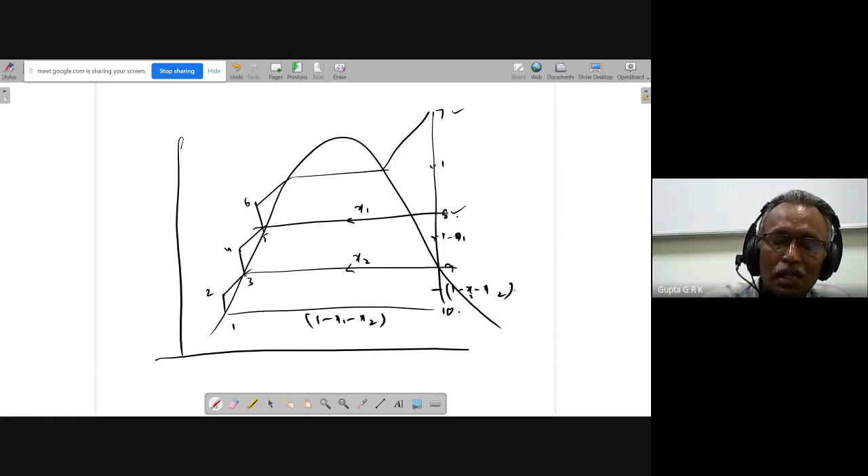Here 1 will go, and here 1 minus x1 will go, and here 1 minus x1 minus x2 will go. So when you take the turbine work: H7 minus H8, plus 1 minus x1 into H8 minus H9, plus 1 minus x1 minus x2 into H9 minus H10. Like this, the pump work comes as 1 minus x1 minus x2 into H2 minus H1, and 1 minus x1 into H4 minus H3, and 1 into H6 minus H5. Like that, I have to find out.

So whatever be the number of feed water heaters, it doesn't matter. Again, if I want to find out what is x1, this is coming out here like this. X1 is coming with H8, and here what is going? This is 1 minus x1. This is 1 minus x1 minus x2.

So what is going this way? What is going this way? What is coming out this way? You have to find out - this is 1 minus x1. So here 1 minus x1 minus x2 is going from this side into H2, and this side, 1 minus x1 is coming, so x2 into H9 is equal to whatever is coming out, which is 1 minus x1 into H3.

Like that, I have to do it to find out what is x2. First I have to find out x1 using the balance here, and then using that x1 I have to find out x2 here. Is that clear? I have to do the heat balance here, and in this feed water heater, I have to find out what is x1 to be extracted. In this one, I have to find out what is x2 to be extracted to get this as saturated at points 3 and 5.

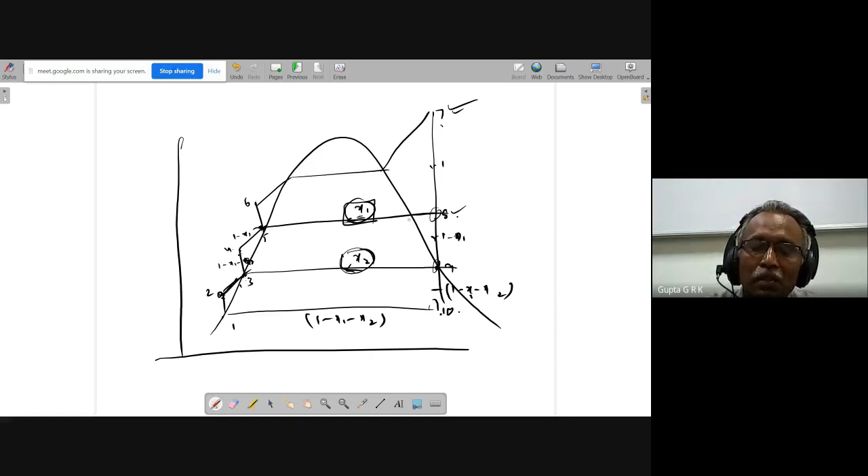It will not be straight actually - if it is superheated, it goes like this. I think with this understanding, you can solve any problem. Any doubts, you can ask.

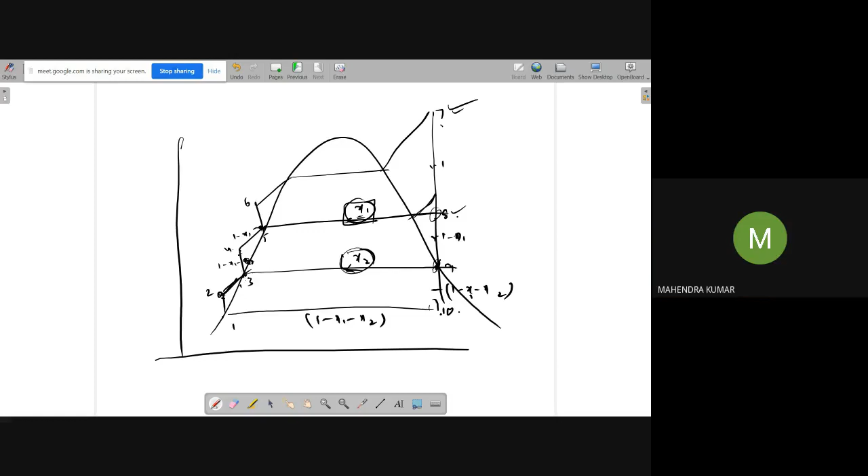Sir, want to tell about pressure losses? Which one? The practical cycles? If you want to have practical cycles, this is somewhat a practical cycle. We can have pressure loss in the boiler, and there can be pressure loss in the condenser, and there is pump efficiency and turbine efficiency like this.

So if you have such a thing, you will be given - actually whatever problem you got in the mid exam - for every component you will be given what are the inlet conditions and exit conditions. So you have to find the enthalpy before entering and after leaving it, and based on that you have to find out all the works. Do you remember the problem - that means we do not need to subtract any terms like that for pressures?

No, for everything there will be given - either pressure loss is this much, so you will be given that you have to subtract it, or you will be given what is the inlet pressure and the exit pressure. It's not like Brayton cycle, it's not like delta P cc, delta P HA, such things will not be there. You will be given the conditions at the entry and exit of each component, and you have to use the tables and find out the enthalpies.

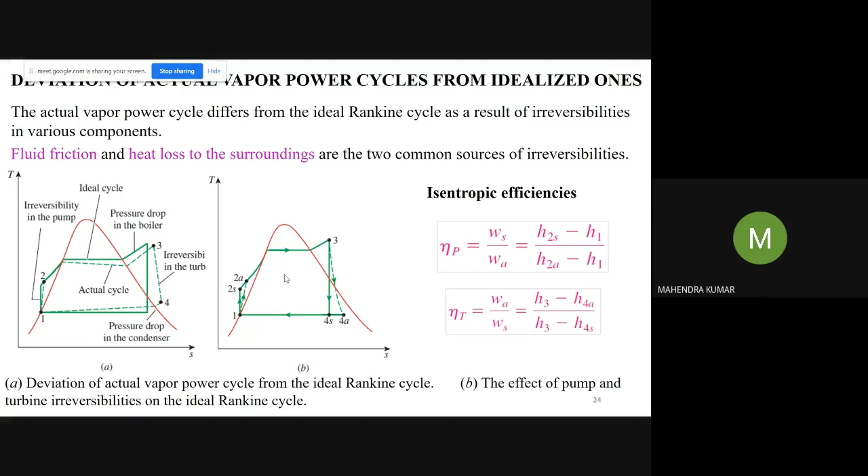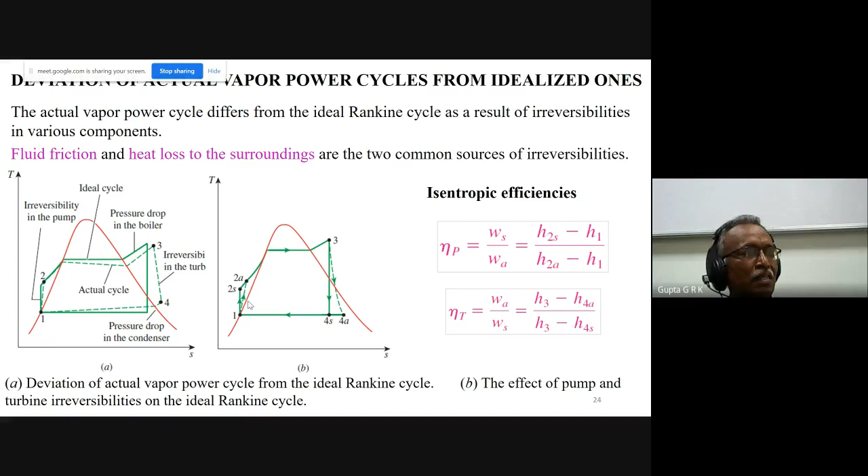Yes, binary cycles you need not study, I think. Binary cycles and, more than that, the important thing is combined cycle. Have you heard about combined cycle? Yes, sir. So both are similar. Binary cycle and combined cycle are similar. Only thing is, in the combined cycle, I have gas turbine cycle, and the bottom cycle will be Rankine cycle, a two-phase cycle. But in the binary cycle, all cycles are two-phase cycles only, topping cycle and bottoming cycle. Is that clear? I don't know whether.

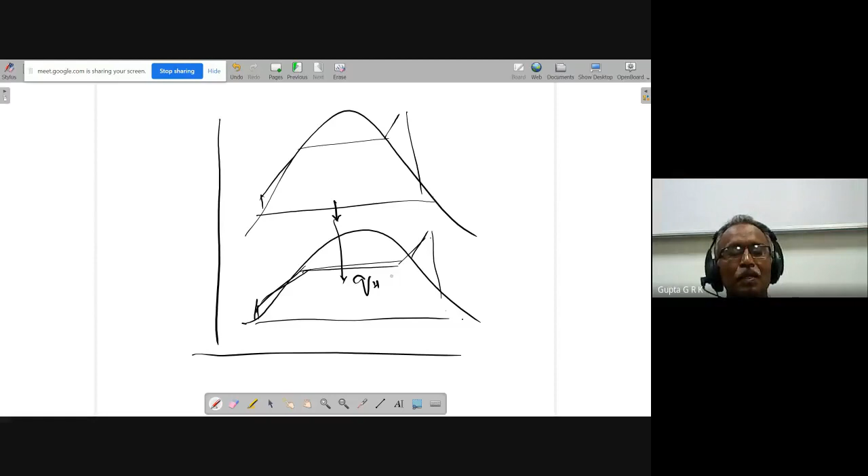So there is one fluid in this cycle, and here there is some other fluid. Based on the properties and characteristics, we choose which fluid is suitable for this range of temperatures and pressures, and which fluid is useful for the other range of temperatures and pressures. Am I clear?

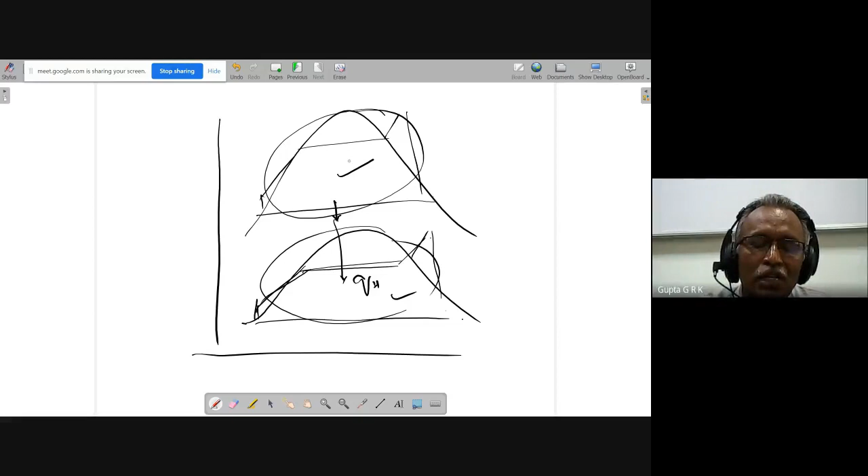So the solving of the problem is similar, right? Only here, the QH I have to take, and I have to use that as the QL from the first cycle, which is used as the QH for the second cycle.

Somebody is asking, sir, can you call this a coupled cycle? No, it is called a binary cycle only. I don't know, maybe in some other books they may use a different term, but usually this is called a binary cycle.

And when the gas turbine and steam turbine work together, that is called a combined cycle. And the combined cycle is a special case of cogeneration, as I told you about cogeneration.

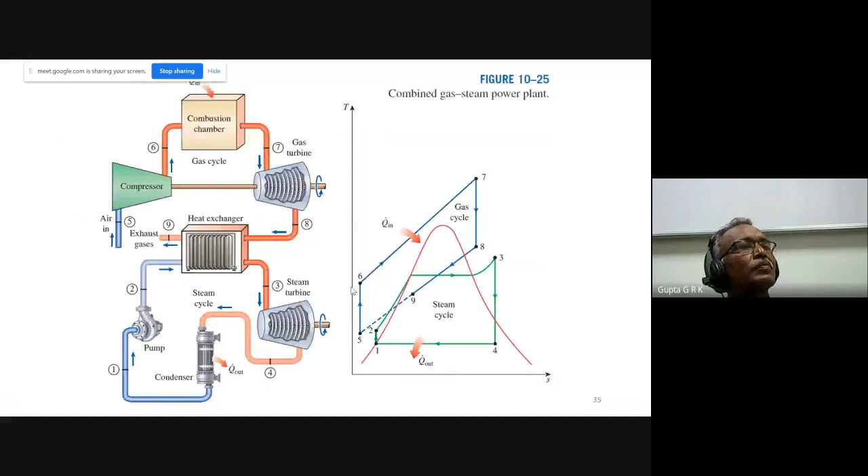So cogeneration is something like what we call process heating. Whatever heat I am going to get, some part of it can be used to run the turbine, and some part of it is used for some process purpose, like drying of cloth, drying of papers, or heating of chemicals in chemical industries. We use heat for various purposes.

So we have to see how much heat is utilized there, how much heat is utilized here, and then I have to find out the efficiency. It is something like this: net power output plus process heat delivered, divided by total heat input, gives the efficiency of cogeneration.

And when you have a combined cycle, I will have W of steam turbine plus W of gas turbine, divided by heat input. That gives me the efficiency of a combined cycle, because only one input will be there.